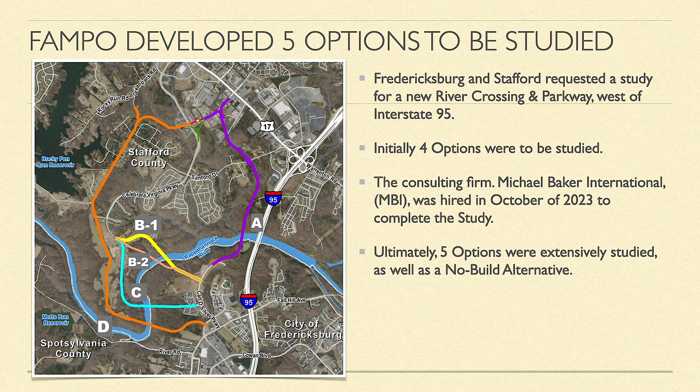At the outset, Spotsylvania County did not support the project. FAMPO initially developed four different options to be analyzed. A consulting firm, Michael Baker International, was hired in October of 2023 to complete this initial study. Ultimately, five options were extensively studied, as well as a no-build alternative.

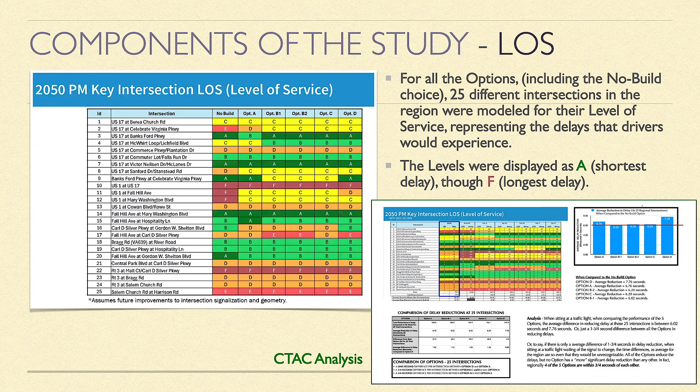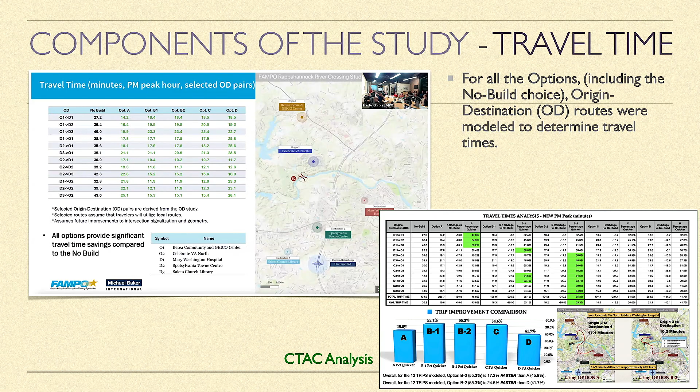The extensive study of the options included many components presented by MBI. There was level of service for 25 intersections analyzed by CTAC. Several different origin and destination routes were modeled to determine travel time between certain locations, also analyzed by Ctac. The different options were screened, particularly their environmental factors, again analyzed thoroughly by Ctac. Additionally, the travel demand of the different options was presented for PM peak hours, but CTAC utilized an entire day's daily crossing volume in their analysis to also view the impact on other existing river crossings.

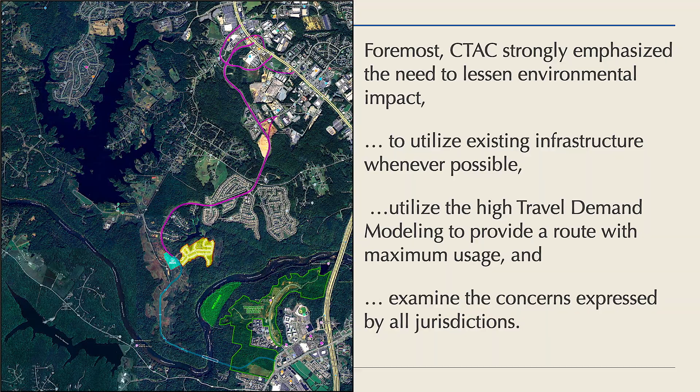Survey data from the public was also analyzed by Ctac, all of which led to CTAC's determination of their preferred route, which was presented to the Policy Board nearly one year ago. CTAC's Bridge and Parkway differed from each of the existing five options.

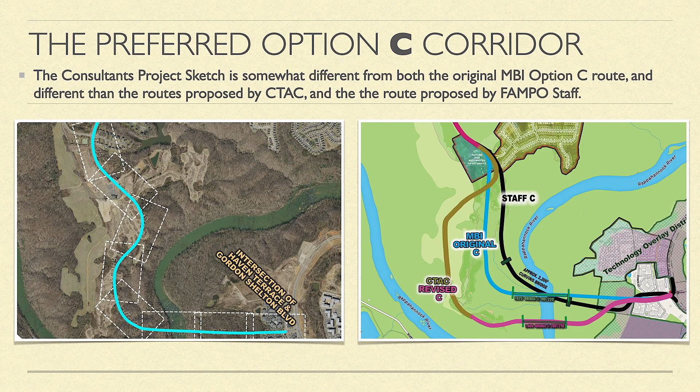On the right side, you can see how CTAC's route differed from the original route created by MBI and by a route that was created by FAMPO staff. Ultimately, on the left, you can see the revised consultant sketch of their final option C corridor.

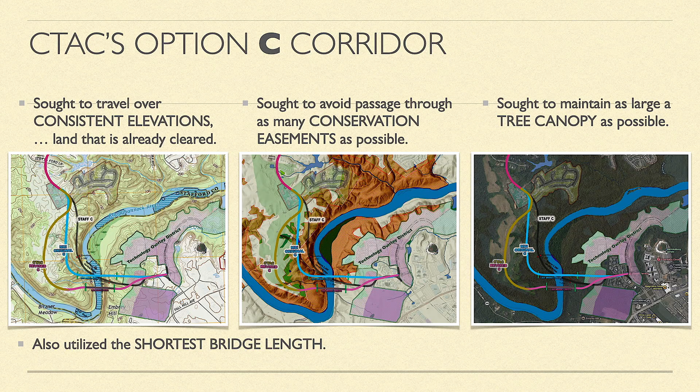Noting CTAC's differences, it sought to travel over consistent elevations, primarily over land that was already cleared. It sought to avoid more of the conservation easements than the other two options, see lines drawn by MBI and staff. And it sought to maintain as much tree canopy as possible, and it utilizes the shortest length of needed bridge. CTAC's option C did not end there, for several reasons.

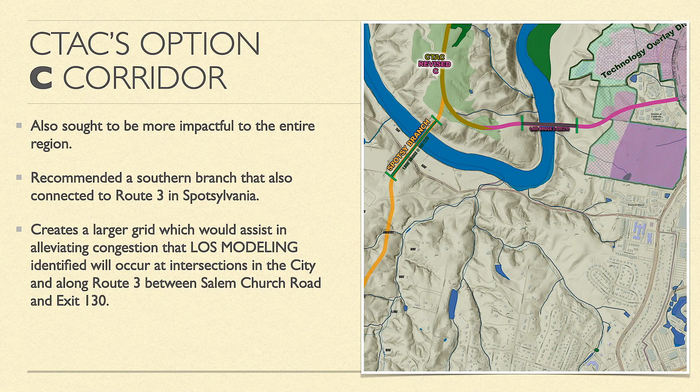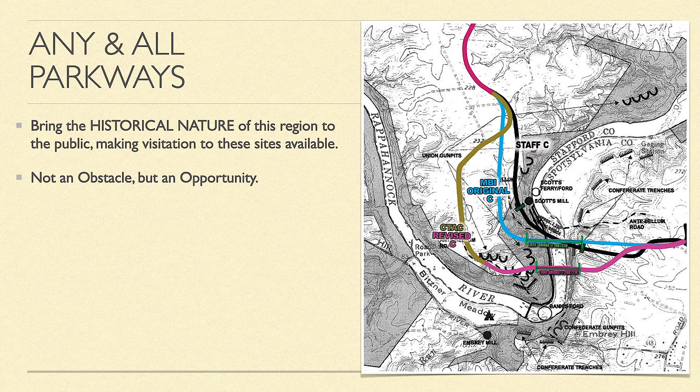To be more impactful for the entire region, a second branch was created that went due south across the river, ultimately connecting to Route 3. As part of the final MBI report, it was noted that whichever route is ultimately decided upon, the opportunity to visit the historical sites of this region should become a part of the project.

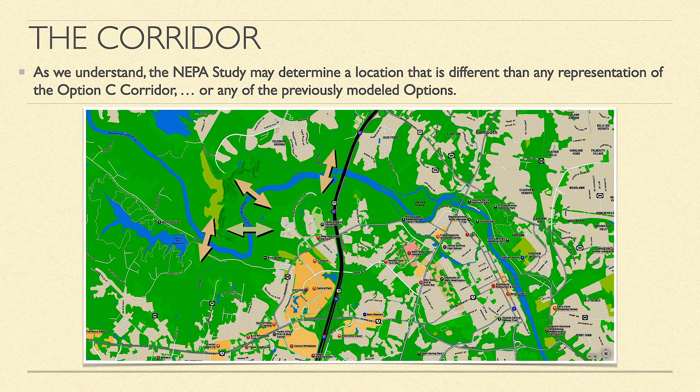As VDOT completes the NEPA study, they will determine the best location for a route, which may be entirely different from any of the earlier options presented, including the option C corridor. FAMPO has applied for a BUILD grant to assist in paying the costs of the NEPA study, which highlights the intent to reduce regional traffic, congestion, trip length, and travel time.

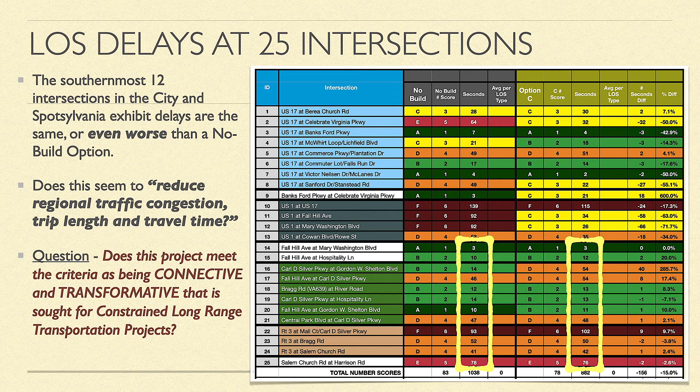You will recall, however, that in the 12 southernmost intersections modeled in the level of service study, the amount of delay for option C is either equal to, or in some cases worse, than if the no-build option is selected. This factor does not seem to actually create a reduction of regional traffic, congestion, trip length, and travel time in this southern part of the region, which is why CTAC proposed the second branch, to connect to Route 3 in Spotsylvania County, creating a larger grid and providing choices for drivers.